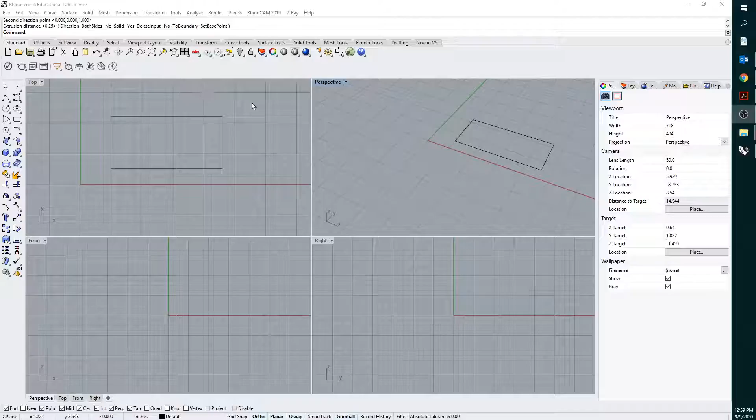In order to show how to extrude in multiple directions, we're going to take a look at this rectangle in Rhino just to make a really simple example. So in the perspective view, we're going to take a look at this. If we type extrude or find extrude in one of the menus, we can see that by default it's going to extrude in a single direction.

If we go up to the command prompt, there's an option up here for direction. So if we go ahead and click that, it's going to ask us first for our base point for direction. So if we click there, and then let's say we go into one of our side views, we take ortho off and we click off to the side, we can see then that that will extrude off to the side.

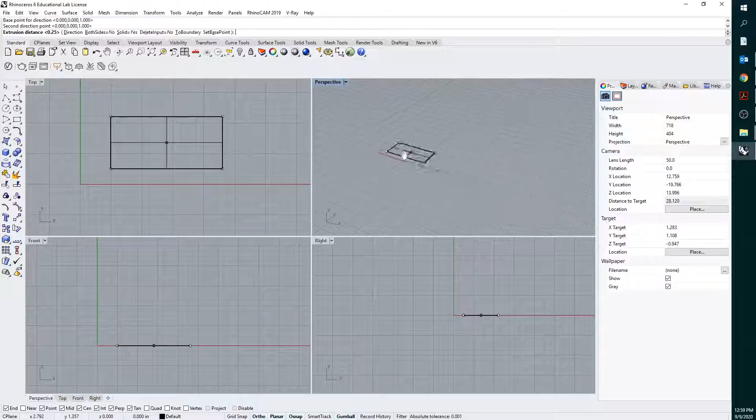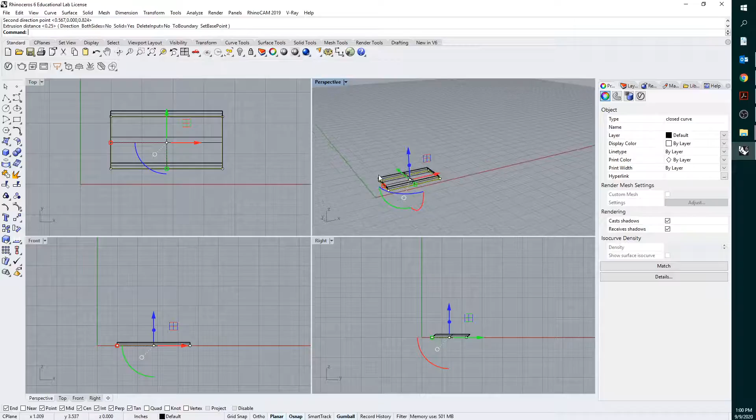If we type D again or go up and click direction and then hit enter, we can go ahead and grab another one of these and then we can extrude off in that direction, and you can see that we can extrude in any different direction that we want. So if we do that, we'll end up with a sort of parallelogram looking form.

So usually to do this, what I like to do is I like to create a guide for the direction that I actually want to extrude in. So if I go ahead and start a polyline, so click our polyline tool, go to one of my ends, and then let's say I want to extrude that direction.

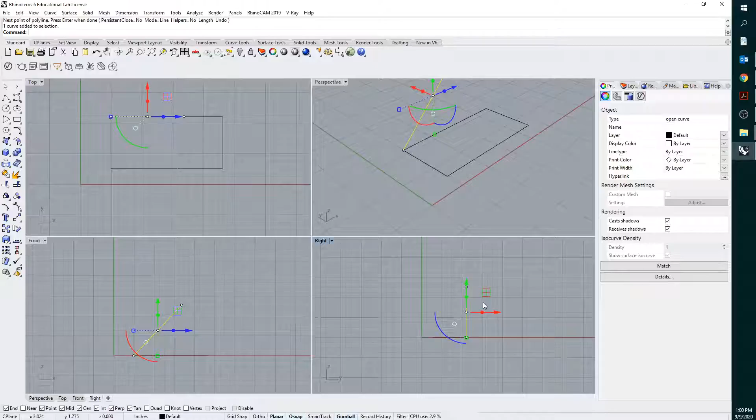And then if I go into my right view, let's say I want to twist this a little bit so that it extrudes in multiple different directions. So a guide curve will help us. So you see that in plan we're going off in a certain direction, and in the right view we're also going off. So this will be a sort of tilted form when it comes out.

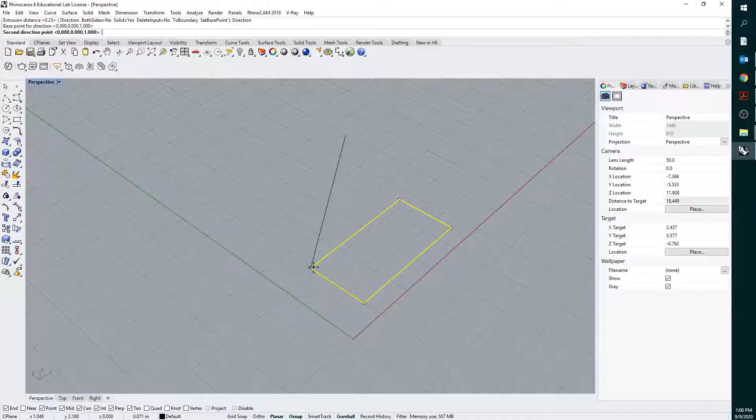So then if I go to my extrude command, I click direction, and then I click the base point here and my top curve there, you can see that I'm actually going to be extruding in multiple directions just along that guide curve.

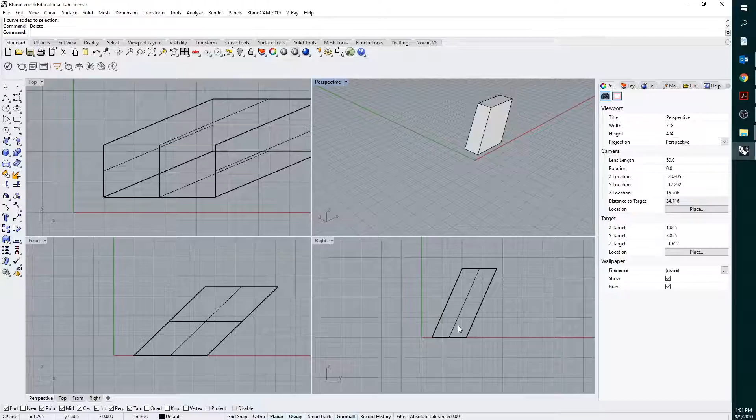So I usually like to add one of those little guide curves just as a construction line to help control, so that I'm not trying to go into my front and right view to control the direction in one step. I can instead do a much more controlled way of drawing a polyline through a multi-step process and then simply using that line as my guide for my extrusion.